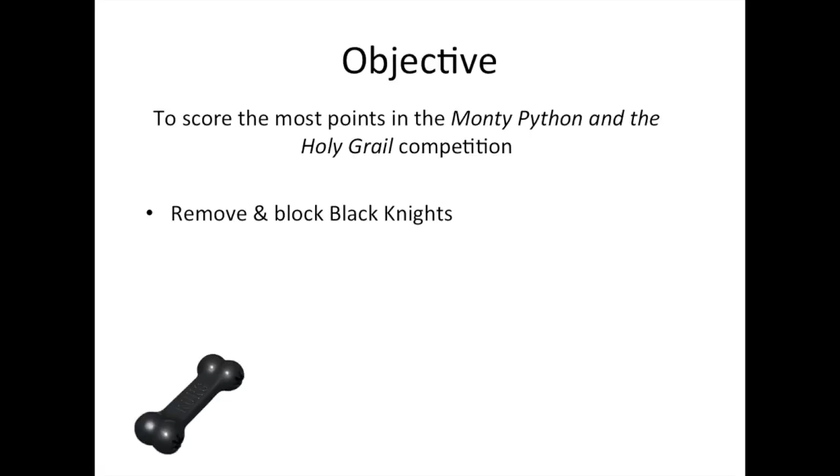To do this, a variety of different challenges must be completed, including removing and blocking the Black Knight, collecting shrubbery, attacking each entrance of the Beast Lair with holy hand grenades, and capturing the Holy Grail. This table shows the distribution of points for the completion of each task. It will be difficult to collect the shrubbery and the Holy Grail because 2 and 3 teams during each match respectively will be fighting to complete the same task.

Due to these challenges, the machine will focus on attacking each quadrant of the Beast Lair with grenades and exiting the competition arena, since these tasks are controlled by the machine's individual ability and will limit the different variables affecting the score each round. While all the tasks will affect the potential to score the maximum of 140 points, the machine will focus on the grenade task as it is the most feasible and has 40% impact on the final score.

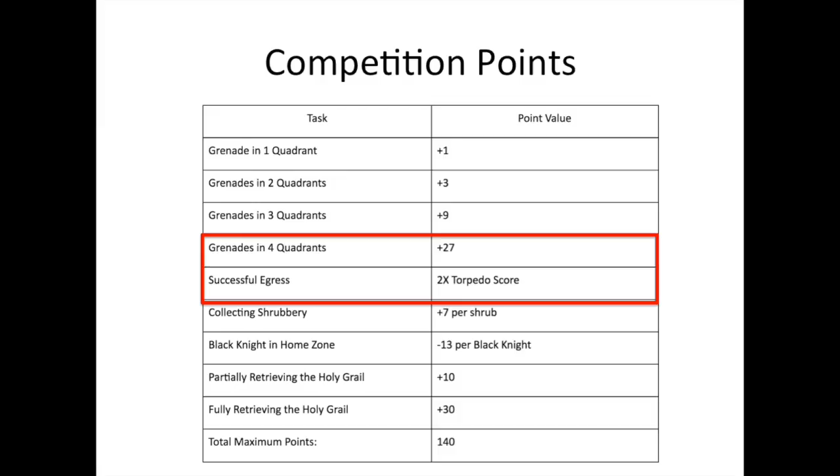Since attacking each quadrant of the Beast Lair and exiting the arena are deemed most important for the final competition, the 5 design concepts focused on differing designs for the attack and egress of the machine. Assessment of the different subsystems was based on the initial prototyping of various ideas.

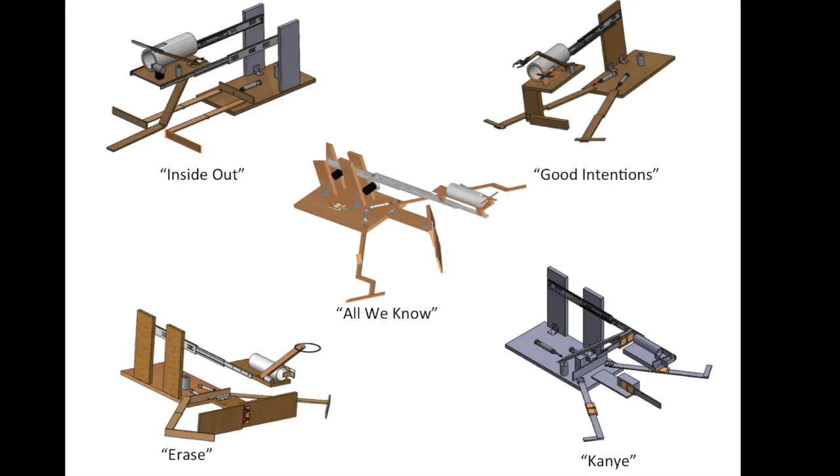The first design is Kanye. To complete the Black Knight task, an actuator knocks an arm that uses mousetraps to hit the Black Knight into an opponent's zone. For the shrubbery task, 2 L-shaped arms fall and sweep from the lair towards the corner of the home zone. The weakness of Kanye is the need for the shrubbery task to be completed first because of the direct competition with opponents.

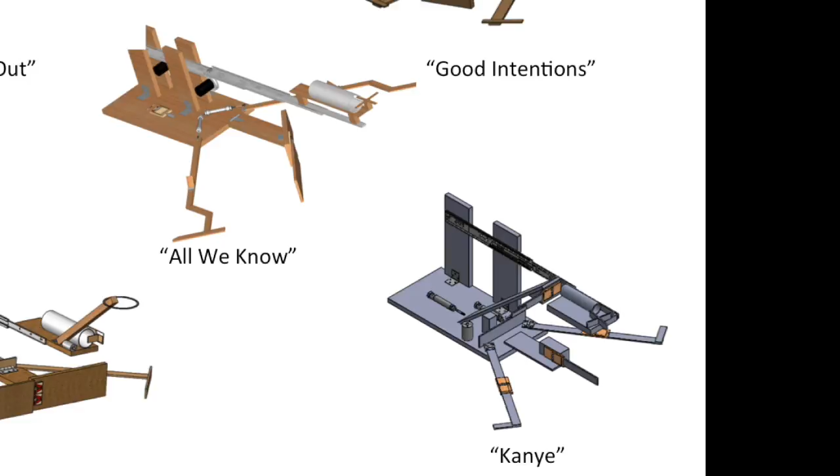To attack each Beast Lair entrance, the grenade subsystem uses a hollow pipe and spinning wheel to deposit the grenades. Finally, the Holy Grail subsystem uses an arm with a hook at the end that flips from a platform using a mousetrap. The weaknesses of this design are that the mousetraps would fatigue and balancing the grail on the hook could possibly lead it to fall into opponents' zones.

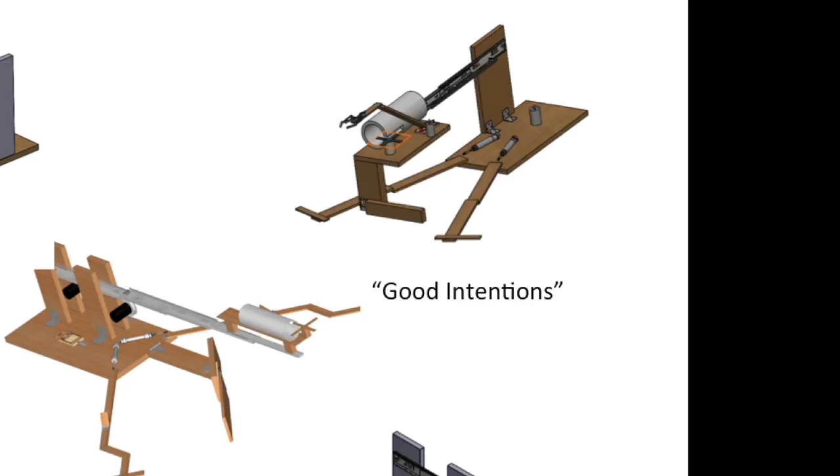The second design is Good Intentions. The Black Knight is removed from the home zone using a wooden arm on the grenade platform that hits the Black Knight from above. The extra weight added to the grenade subsystem would weigh down the platform, possibly preventing it from reaching the lair. To collect shrubbery, 2 arms flip out and fall over shrubs to rake them in using a motor and string in combination.

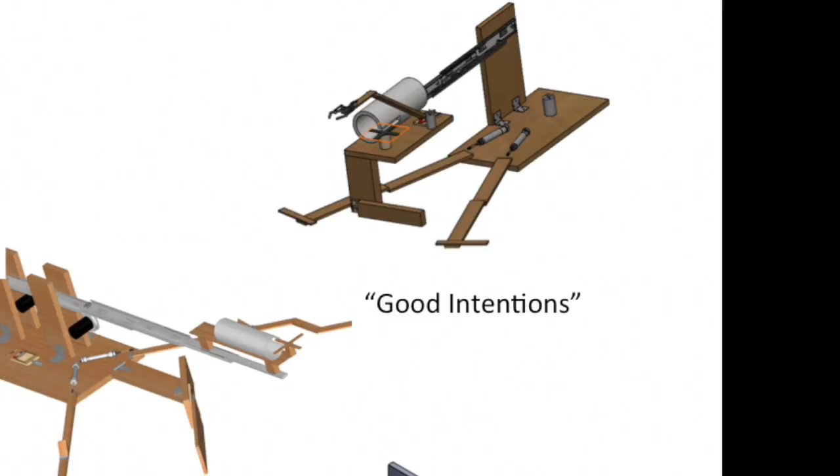To attack each Beast Lair entrance, the grenade subsystem uses a similar design to Kanye. For the Grail task, an arm would extend with a gripper that would be activated by a solenoid. This subsystem could cause interference since it is placed on the grenade platform, defeating the purpose of focusing on the grenade task, and it could also possibly knock the Grail into opponent zones.

The third design is Inside Out. The Black Knight task uses an arm with a scooper and an actuator to bring the object towards the machine and out of the competition arena. Because the L-shaped shrubbery arms sweep instead of raking, other teams' arms could extend over the shrubs, preventing Inside Out from collecting them.

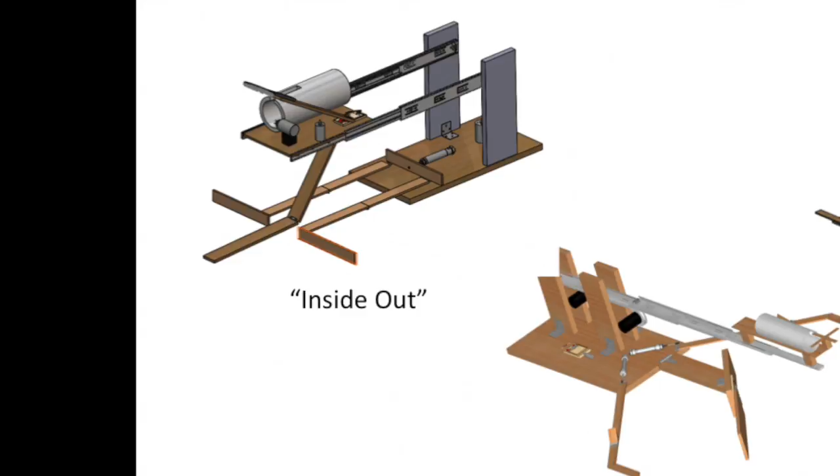A hollow pipe on a platform releases grenades into each entrance when a solenoid is retracted. However, a mechanical mechanism would be more reliable than depending on the myRIO to make the solenoid work properly. The Holy Grail is captured with the extension of a bug-catching net.

The fourth design is Erase. To complete the Black Knight task, an actuator swings an arm to push the Black Knight into the other team's zone. The shrubbery task flips 2 arms towards the corner of the home zone to rake shrubs in using a combination of motor and string. Interference between these 2 subsystems is possible.

The grenade subsystem attacks each entrance with the use of drawer slides and a hollow pipe. A mousetrap allows for the passage of the grenades in each slot of the lair. Since mousetraps are used, Erase would fatigue and they would need more frequent replacement. The Holy Grail is captured with a grasping contraption held open by a solenoid that would then close around the Grail.

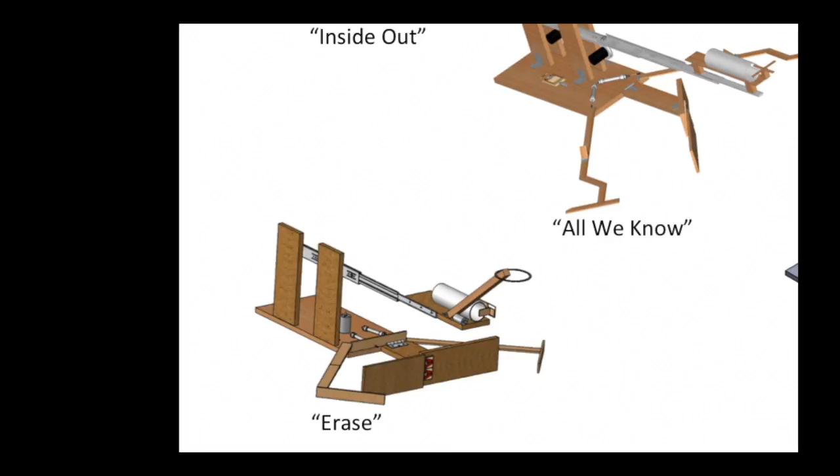The fifth design is All We Know. The Black Knight task is completed by using a wooden arm on the front of the machine that is held back by a string until a solenoid retracts and sets off a mousetrap. A clasp is released when the mousetrap is activated. While the mousetraps will fatigue and need frequent replacement, hitting the Black Knight from above allows the gravity of the falling arm to contribute to the force that removes it.

For the shrubbery task, 2 S-shaped arms are used to maximize the length while meeting the boxing requirement. They are propelled out towards the lair and over the shrubs to rake them in towards the corner of the home zone. All We Know allows for the collection of the shrubbery without interfering with the removal of the Black Knight.

Once the Black Knight subsystem has fallen and the grenade subsystem is actuated, the drawer slides move towards the lair. The drawer slides are mounted horizontally to utilize gravity to propel the subsystem forward. A hollow pipe is mounted on the platform and deposits grenades using a wooden wheel. A Holy Grail subsystem was not designed for this machine. Although only one design was selected, all designs were revisited to improve the final design concept. So which design was selected?

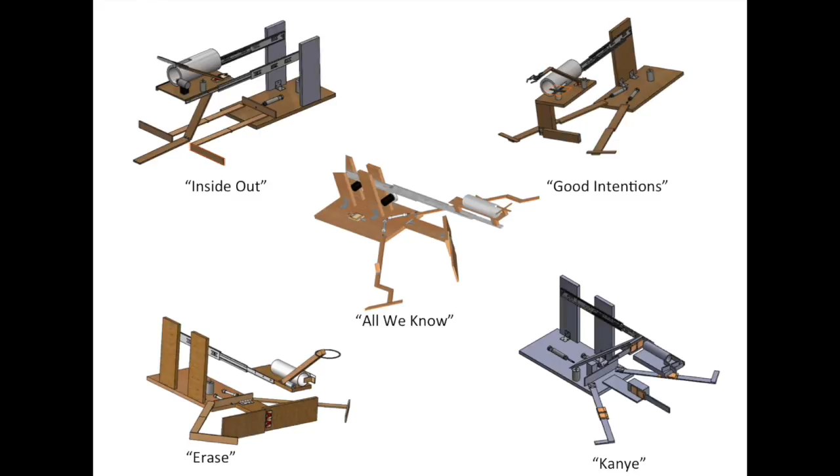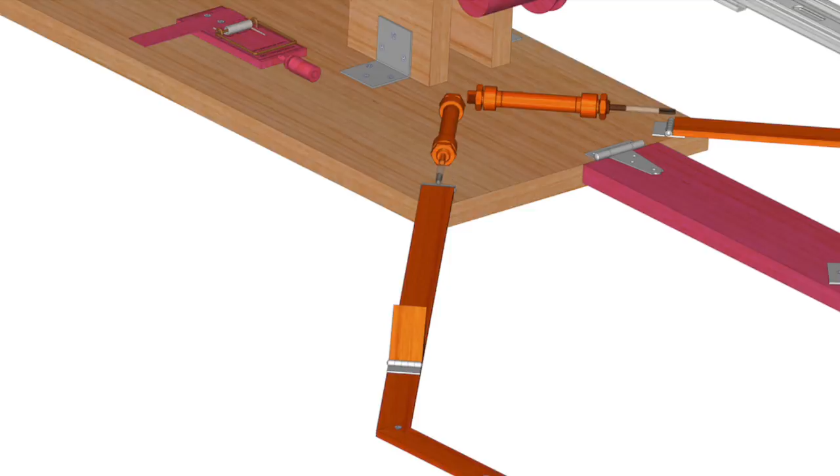Two pneumatic actuators push the shrubbery subsystem arms over the shrubbery. Wedges by the hinges maintain initial angles so the arms can flip over the machine. A solenoid retracts and releases the tension of a string connected to a mousetrap on the machine to push the Black Knight subsystem forward. The first motor pulls in the string with the clasps to open the Black Knight subsystem and then pulls both shrubbery arms with strings back 3 inches to ensure the shrubbery is pulled into the home zone.

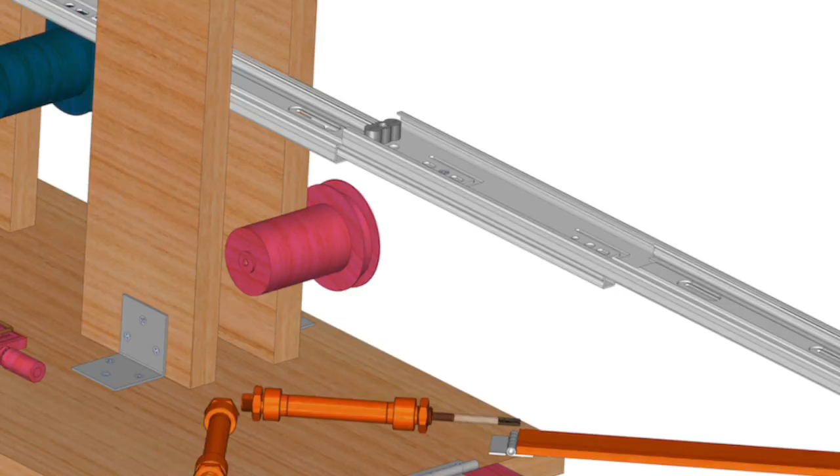Drawer sliders 1 and 2 of the grenade subsystem were mounted horizontally and propped up by the Black Knight subsystem. As the Black Knight subsystem falls, the grenade subsystem is released towards the lair in the center of the arena. A second motor is utilized to pull the subsystem back towards the home base. The Black Knight subsystem was programmed to release after 33 seconds as it was assumed other teams' shrubbery arms would no longer be blocking their home zone. The Black Knight was never removed from the home zone during testing before the qualifying round.

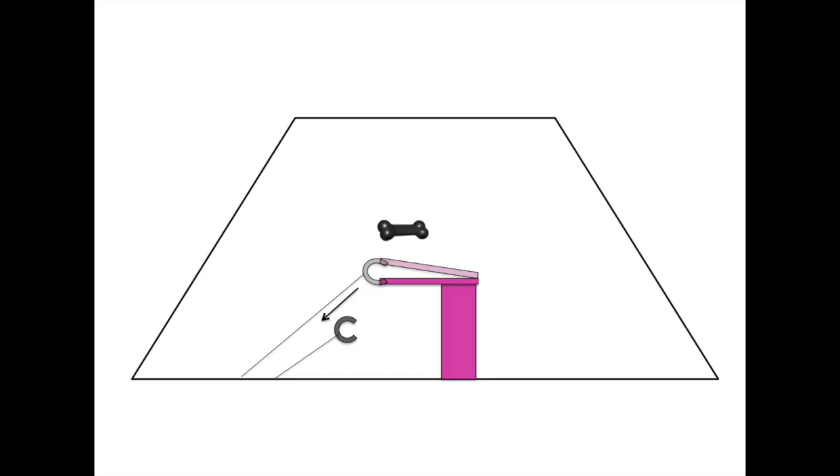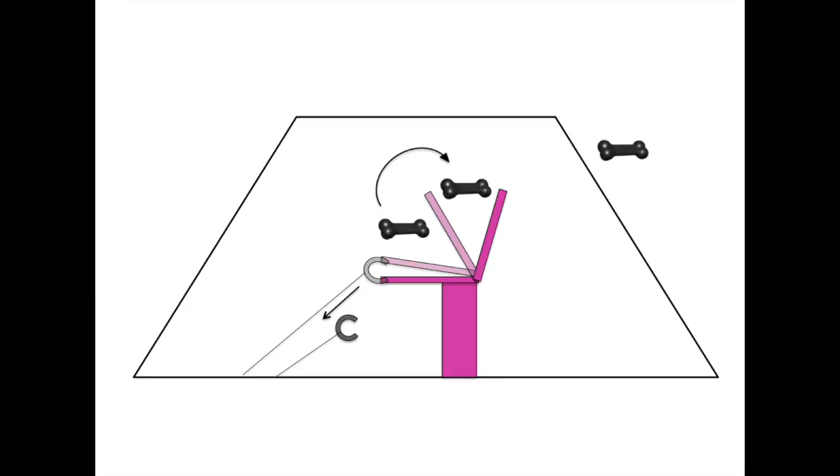The overall designs between the qualifying and final rounds were the same, but improvements such as replacing the mousetraps more frequently, changing the direction of the removal of the Black Knight, and shortening the width of the overall subsystem were made. Testing before the competition led to the removal of the Black Knight 5 out of 20 times. Although the Black Knight only had 25% reliability, our primary incentive for removing the Black Knight into an opponent's home zone instead of bringing it into the home base was to be able to reach the marking difference of 26 points with neighboring teams instead of 13. Design ideas to bring it back into the home zone were not explored for the final design.

All We Know allows for the collection of shrubbery without interfering with the removal of the Black Knight. It also slightly blocks other teams from moving Black Knights into the home zone. The shrubbery subsystem had successful runs 6 out of the 10 times before the qualifying round, with a maximum of 14 points gained. The shrubbery subsystem changed from a sweeping to a raking motion between the qualifying and final round, so the arms would fall over the balls, increasing the likelihood of collecting them before opponents.

The S shape of the arms replaced the straight arms with the L-shaped ends to increase the amount of balls collected since the arms were longer. This design was reliable 12 of the 20 runs and brought in an average of 4 shrubs with a maximum amount of shrubs collected 25% of the time. This ultimately led to this selection over sweeping arms that averaged collecting only 3 shrubs.

During testing before the qualifying round, 9 points were scored each time for the grenade subsystem. This subsystem worked properly on 4 of the 10 runs. Most of the design ideas for the subsystem were prototyped, tested, and analyzed before the final competition. Some of the flaws that were repaired from the qualifying round machine included the change in drawer slider position from vertical to horizontal to utilize gravity, the attachment of the grenade subsystem to more centralized pillars to prevent blocking of the shrubbery arms, and a more supported grenade platform design to reduce movement of the base. A simple revolving door design was selected for the grenade subsystem because it worked 85% of the time with an average of 33 points collected.

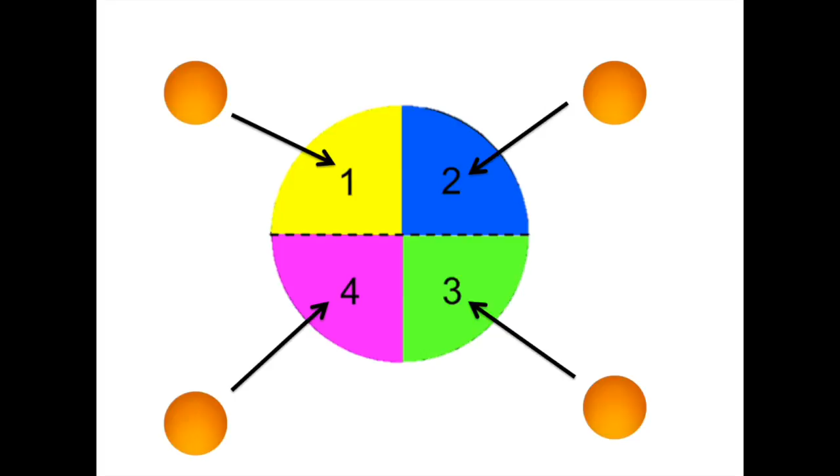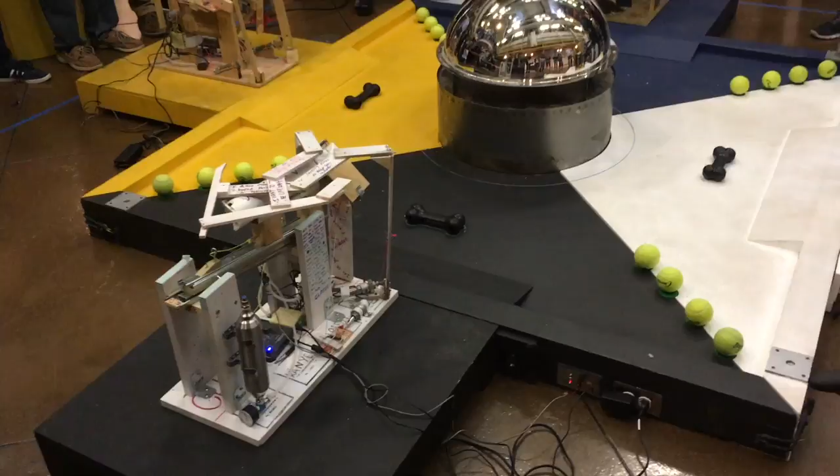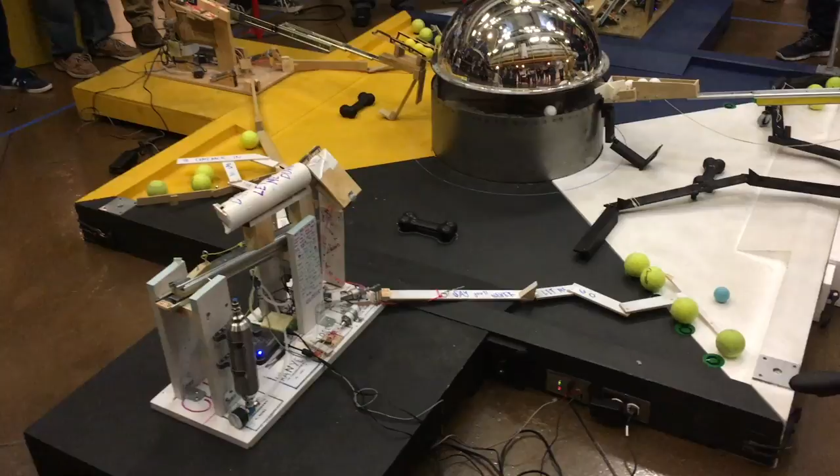Although All We Know performed well during testing, results cannot anticipate being as consistent as the initial tests since other teams will be competing for the same objects in the final competition. So let's see how All We Know did in the final competition. During the final competition, All We Know made it past the first and second round with a placement of second and third and a score of 8 and -13 respectively. All We Know was then seeded 42 for the third round. In the third round, All We Know placed third with 3 points, resulting in immediate elimination.

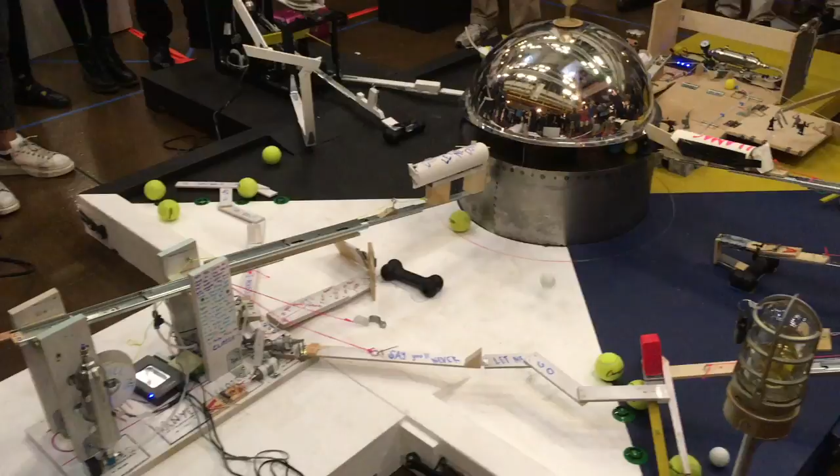Due to unknown variables in the final competition, the machine did not perform as predicted. For example, opponents retrieved shrubs first. Although the grenade task was the primary focus for the competition, it never reached the lair as intended during each round. Unfortunately, All We Know did not work properly because ropes tangled, inhibiting the Black Knight and grenade subsystems from actuating.

Today we covered the 5 design concepts generated and the evaluation of each of these designs. All We Know was chosen because of its ability to complete the grenade task, followed by the Black Knight task and the shrubbery task most effectively. All We Know was tested, evaluated, and modified to maximize the points scored into the final competition. Testing proved the machine to be reliable, however, during the final competition, it did not perform as tested. Going forward, new approaches to capturing the Holy Grail should be explored, the shrubbery arms should act faster, and motors and mousetraps should be placed better so ropes are as short as possible to avoid tangling.